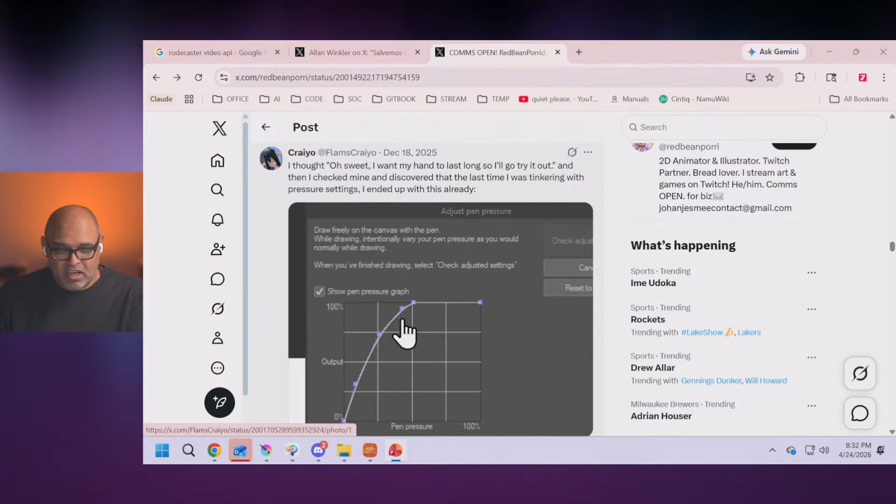And this person, I gotta tell you, well, I'll get to that later. Everyone, I see a lot of people changing the global pressure curve, and I think you should not do that.

Uh, wild curve. We can try it. We can try it.

Let's see, Lucky or Luca says: there are way too many variables to say this will work for everyone. True, that's totally accurate. I think better advice is to tell people to try different configurations if they're suffering from wrist or any arm-related pain.

It also depends on the specific pen. Let's suppose you have two pens, right? Let me pick up two pens here. You have to use a different pressure curve for each one. Actually, you don't - if the pens behave similarly, you don't need to do that so much.

But a Huion pen might behave very differently than a Wacom pen, right? And two Wacom pens might behave very differently. So it's per pen unit, not just per pen model - it's per pen unit, which is another fact lots of people do not realize.

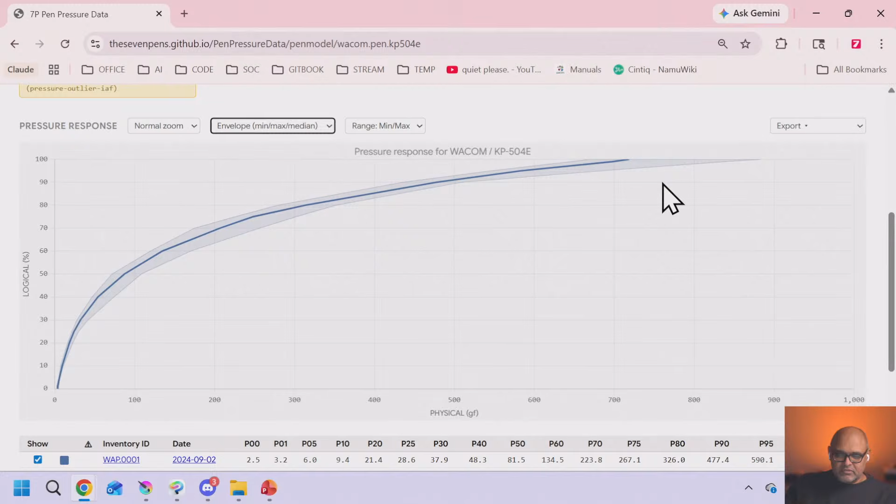Now I'm going to do one more thing. I think I'm going to take pen families and just group them all, and click them all. And I'm going to compare them, okay? Now watch this, I know it looks like a mess. Don't worry about it. Here's every pen I have. What do you notice?

It's kind of a pretty graph, right? The maximum pressure is all over the place. Let's go ahead and just take a look at the envelope. If you look at all the pens I have, some of them go all the way here, but they all go up sharply at the beginning.

What does that mean? What does it mean that they all go up at the beginning, pretty sharply? Some very sharp, like this blue line. I'm pretty sure, I can find that out, it's probably a CP913 or 23. Some don't go quite as sharp.

What does that mean? Well, the secret is understanding that the left column, or the y-axis, is the logical pressure, the percentage of pressure. So let's put it this way: I have the numbers here for these pens. Let's take the Wacom, it's called the KP Gen 2. That's the Pro Pen 2 family.

If I press, what does it take for me to get to 25% pressure, right? For the Pro Pen 2, I really have to press it with 25 gram force. That's 25 pinches of salt. Okay, now what about the... let's see, I would say it's decently sensitive.

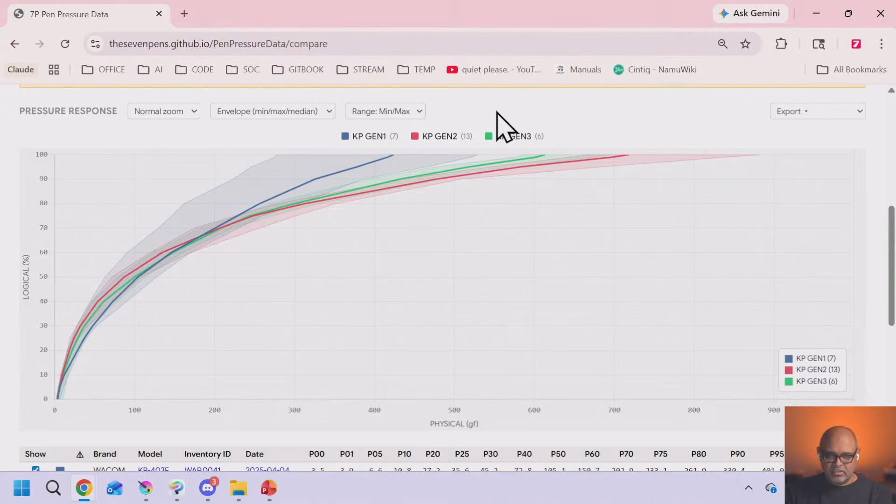Let's scroll in here and go to envelope and make sure... I don't know why, oh no, I looked at the wrong chart, I'm looking at flagged. Let's go to envelope and split them by family or by model.

I found them very, very similar actually. They're high, whereas the Pro Pen 2 ends up like 700 something. Their max pressure ends up at 400. That's why 400, 350 is kind of my threshold for good, because for like a decade these pens were considered the best in the market. So I think it's good to say 300, 400 is the bar for a good pressure range.

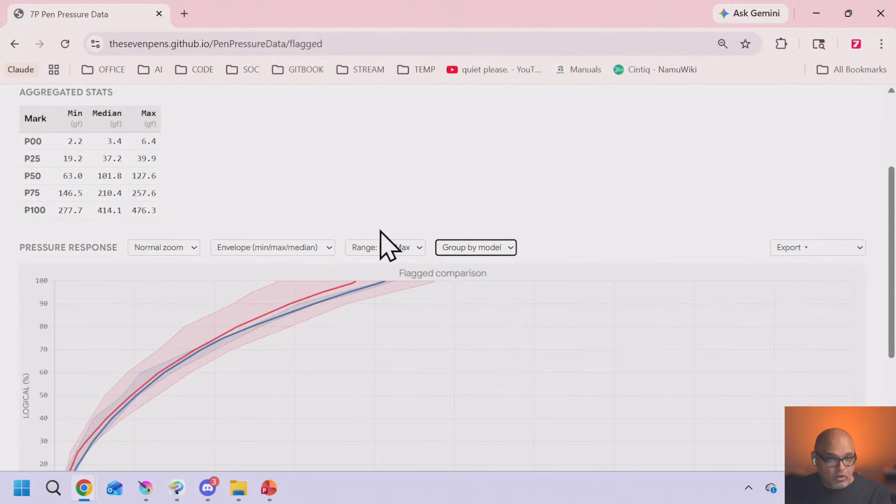Again, they're steep at the beginning. That means they're a little hypersensitive, hyperreactive at low pressure. Now what does all that mean? Well, we're going to show you that too, because we have tools to help you.

I think it's called Curve Explorer. Yeah, it's called Web Pressure Explorer. My fault. Okay, copy and let's paste it in.

So I'd like you to open this up. And you have to have a tablet, obviously. I'm going to move my keyboard to create some space. And it doesn't matter what pen you have, okay? I just want you to take your pen and draw, there's two canvases on the right. You can draw on either one, doesn't really matter.

Tablet plugged in. It's not reacting to it. Not reacting to it, why is that? Oh sure, let's try this. I didn't have the hub plugged in. No, looks like I had to plug it in directly. Not a problem. Sometimes USB hubs don't work the way I expect.

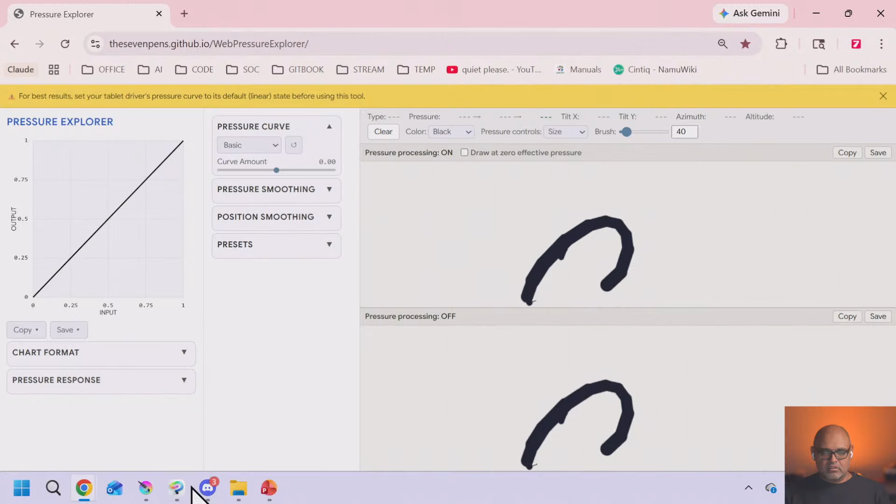There we go, and there we go, I'm drawing. Okay, and let me clear. Add Pro Pen 2? Happy to. Let's go back there, I'll have to restart that.

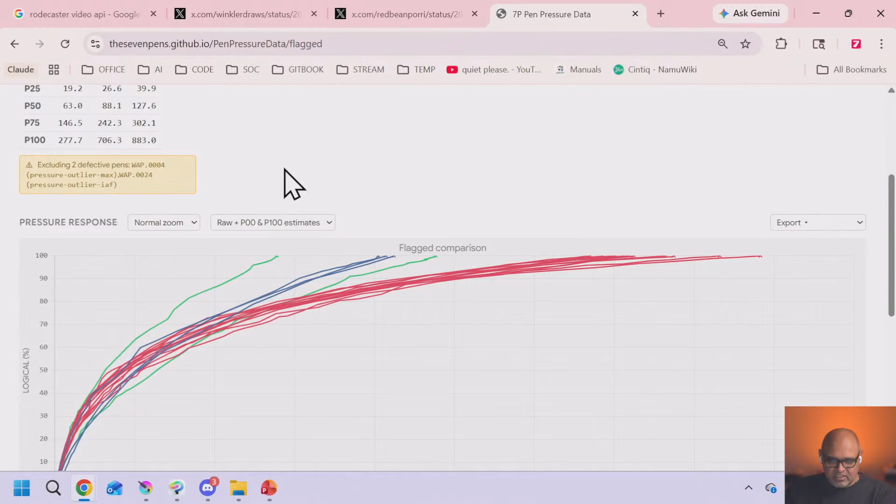Stream tools. What was it called again? Pressure... oh, it's data, pressure data. Yeah, okay, the flag, let's add another. You wanted Pro Pen 2? KP50... sometimes I can't even see them. KP504, okay, I have 9 of those and 13 measurement sessions. Let's go back to flag, take a look, divide by, make the envelope and group by family.

So you can see red is KP504, the Pro Pen 2, right? So it's a little more hypersensitive than the previous generation, and it has quite a bit higher, almost double the maximum pressure.

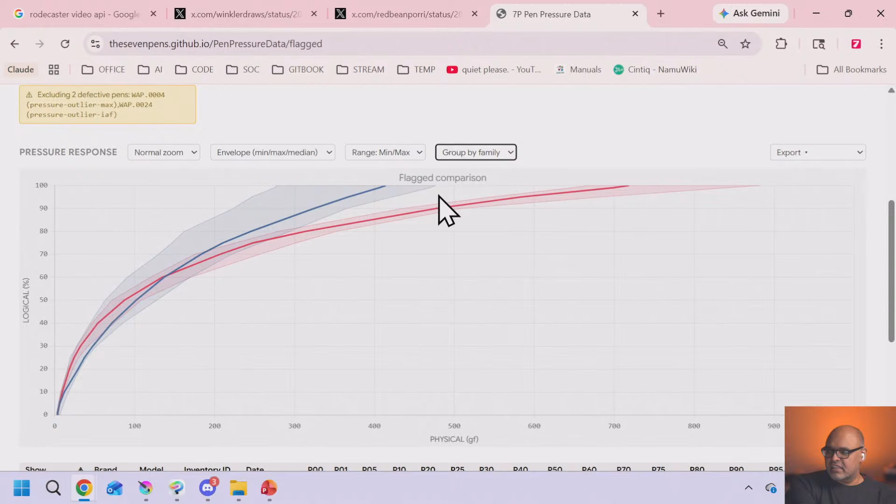Let's see, Aquareg says do the Samsung Ultra 22. I see, do all those Samsung Ultras and Samsung Galaxy Tab pens have the same pressure curve? We can take a look at that. I can't say about the pen that's in the phones, but I can tell you about the tablets. Good question, let's take a look.

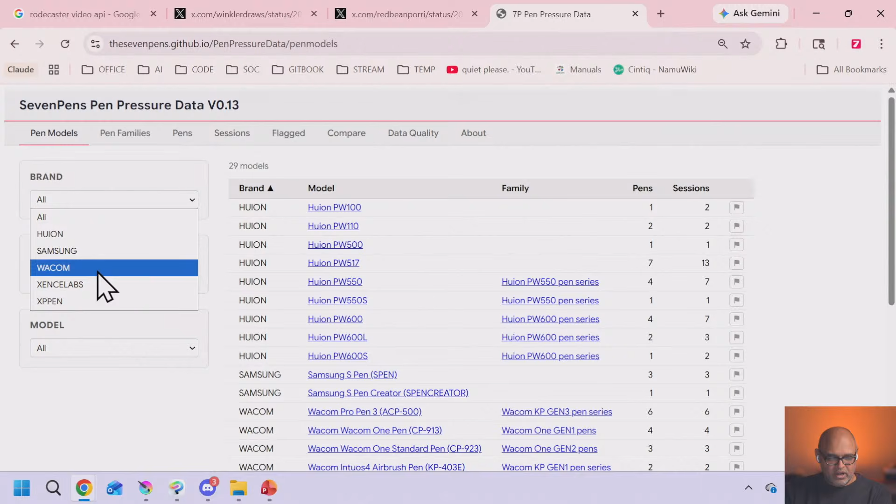Let's clear these flags and take a look at brand Samsung. And what do we got here? Yeah, I'm going to put these together. And let's just take a look at the flagged.

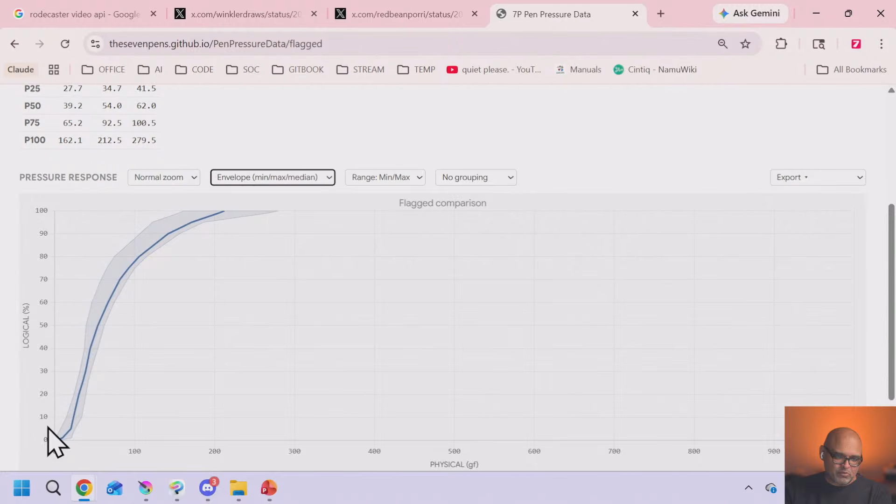By the way, there's some messed up stuff with the IAF, so don't pay too close attention to it. They have a high IAF, so basically these pens are... actually let me give you a little more information. They have a high IAF, so they kind of ignore the beginning part here, that's why it looks strange. I wasn't good at measuring at the time, I've gotten better but not perfect. They rise up very steeply.

And they end really quickly at 200. 200 is like, okay, it's like okay. And some are to the left. Remember, that line is the median, half of the pens are to the right, half the pens are to the left. So some are like 160 gram force maximum pressure. Not great. Why is it not great? Because when the maximum pressure is low, you will suddenly hit it. It's really hard to control pressure when the slightest touch will send you to 100%, okay? And there's nothing you can do to stop that. Pressure curves can't save you from that.

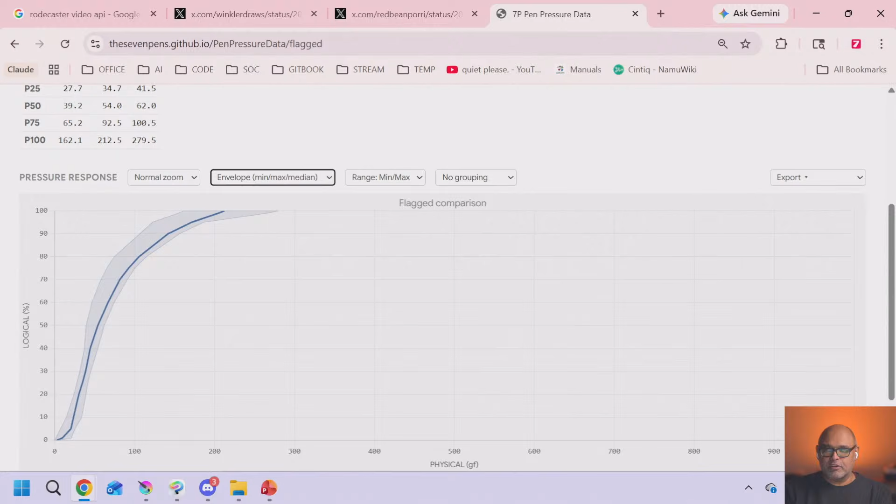Now I'll say one more thing to be completely honest. I also believe that the pens and even the drivers that talk to them are designed not to have low IAF.

They are those S Pens and Wacom CP913. They are designed not to have low IAF. They're engineered to not have it. Why would that be? Why would I make a claim that's that brash? Number one, remember I told you they use an older form of EMR? Well, so do some Huion pens, and those Huion pens have significantly lower IAF than these. So that tech isn't the reason, or at least you can't fully explain it that way. Number two, I think there's a business reason. I think they don't want those pens to have super low IAF because they want to sell you on professional tablets that have professional pens with really low IAF. Okay, that is my statement.

Okay, KP701 versus KP5. I love this. People are asking to look at data.

You know, this reminds me, I watch a YouTube channel. I forgot, the guy's name is Dan McClellan. He's a scholar. I'm not religious, by the way, I just want to make sure you understand this. But I'm really interested in the study of religion, and he's a scholar of the Bible, in a textual criticism sense. He's not religious on his channel about his beliefs, he just talks about how the texts originate and what we can interpret. He speaks Greek and ancient Hebrew, kind of an amazing guy. But his theme is a concept called data over dogma. What do you believe? What have you been told to believe versus what was written? How has the text literally evolved? Now, whether or not you're religious, I hope I didn't offend you, but I liked his approach of data over dogma. The drawing tablet world is filled with a lot of dogma about how these pens behave and what pressure curves do. I'm trying to give you the data so you can make your own decisions. And that's why I have maybe peculiar views.

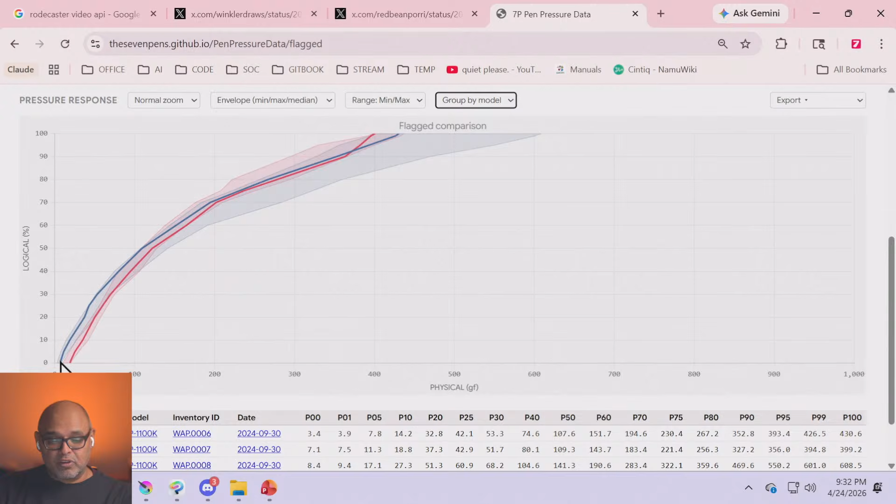Let's go to envelope, I should make envelope the default. Did I not add the second one? Let me group by model. So, very similar. Now there's something weird that happened with the IAF, I may have messed that up. So don't pay attention to where they begin, just pay attention to the overall curve. I think, can you see? You can't see it, my mistake. Okay, sorry, here we go. Don't pay attention to this part, I believe they're closer than this implies, I had made a mistake, and so I need to remeasure these pens. But just assume that they both are really low, like both are where the blue begins, okay? But just pay attention to the general shape. I think they are basically very similar, right? That's what my data says. I see some variation, but again, I measured these pens when I was a young tablet researcher, okay?

Plastic nib on the S10 feels so good and glossy, not on matte. Yeah, that's what I thought. I know on paper the S Pen is supposed to be a really crap pen, not supposed to be great. However, I actually really like drawing with the S Pen on a Samsung S tablet. I don't know why, but I like it. It feels good to me, even though I'm used to the Pro Pen 2.

Okay, so now you understand what pressure response is and the behavior - this is what the pen actually does. Now let's try to understand what the pressure curve does. For that, I gave you the other tool, wherever the heck it is.

Let me find it again. Clean up. Tools. Okay, let me paste the link. It's called the Web Pressure Explorer. I have a local version of this on Windows, but this is good enough.

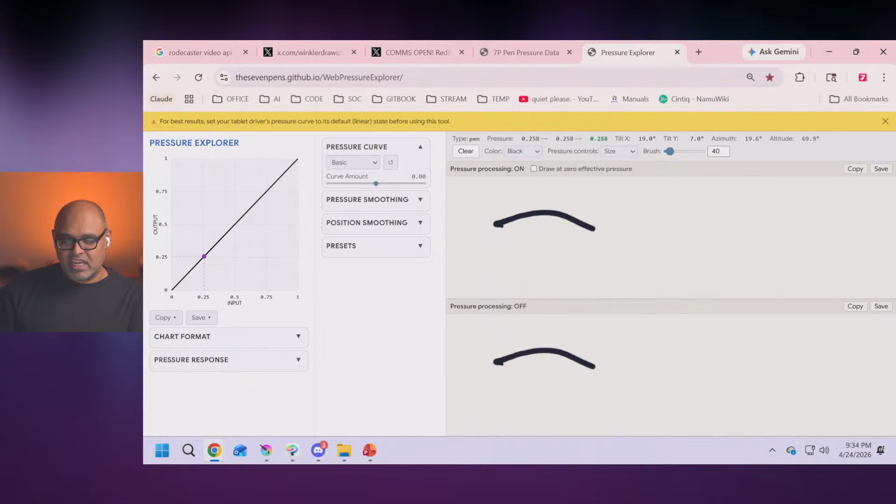So let's pretend we're looking at the driver for a second. Actually, I'll switch it like this. Okay, so here's the curve. Now open up the app, and on your tablet - doesn't matter top or bottom - just draw. The same stroke will be drawn. Just sketch, doesn't matter. Try to draw light, try to draw heavy, and you can hit delete or backspace to erase.

Now, first of all, the curve is here - what does the curve mean? It's straight from the bottom left to top right. This curve means do nothing, it is not doing anything. I'll prove that, but first let's see a little bit of what happens.

Let's try drawing real light near the low end. What do you notice? There's a little dot here when I'm drawing - that's the actual pressure, a purple dot. Note, I'm trying to keep it steady, but it's hard - I have to really work with my hand, trying to keep it between certain levels, and it's bouncing up too much. Now, because this is a web app, you have to keep the pen moving - don't keep it still, the web apps don't read the pressure correctly if you're not moving. It is hard to keep it still at low pressure, it's very normal.

Now, what about at high pressure? I'm going to go really high - I can keep it pretty still. Why is that? It's really easy to press down consistently high, right?

Here's an analogy I would use. Have you ever seen someone balance something in their hand? Let me just show you this. I have this - what do you call it, a level? I'm going to try to balance it in my hand. I will really try this. I can kind of do it, actually.

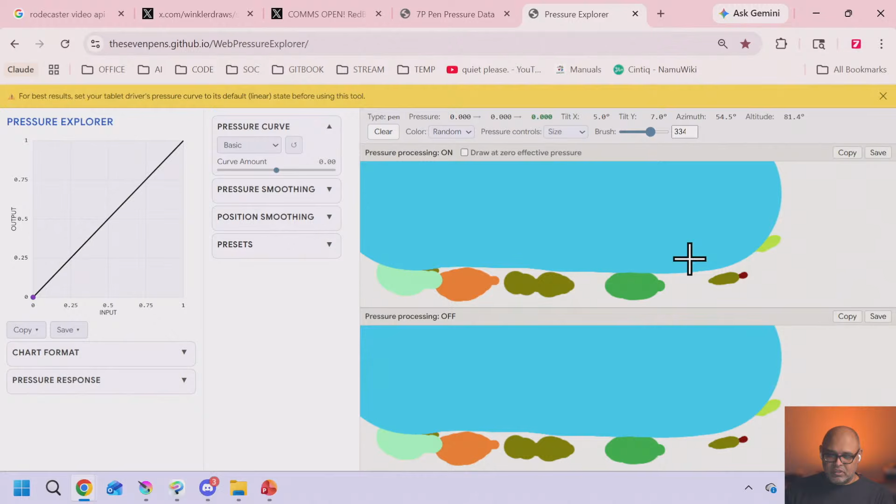It's such a big pen. Let me change the brush size. It's pretty consistent, it's not jumping all around the place, is it? It's smoother because it's easier for me to deal with the mass of the system. So pens at low pressure are hard to control.

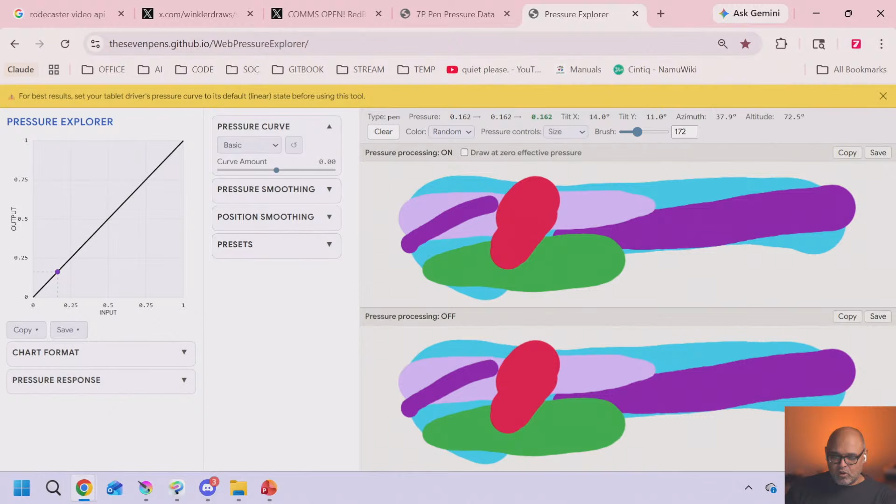So if you're drawing at low pressure, look at this. Let me erase this. This is a 172 pixel brush, but it's hard for me to get to like 1 pixel, 2 pixel, because it's hard to get to those small values. It's overreactive, it's hyperreactive.

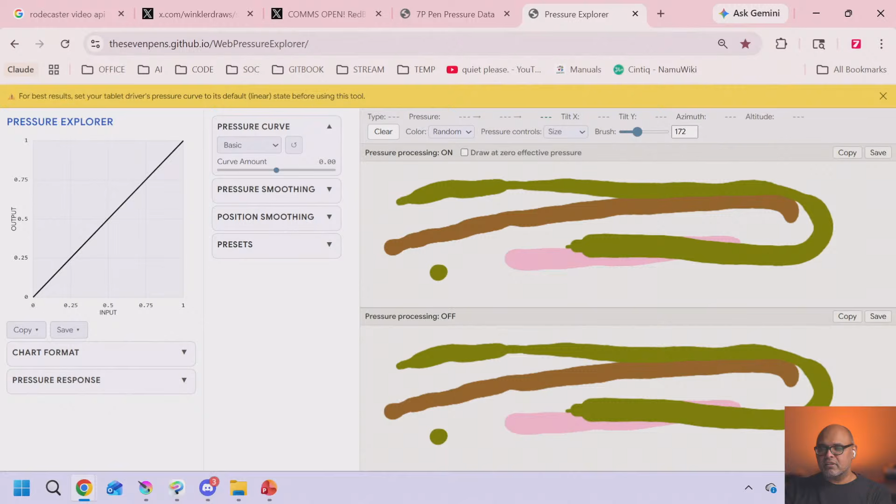Here's what you can do. Now the top is the process pressure, the bottom is the raw pressure, with no pressure processing. Oops, my music is off, let's bring it back on. Okay, let me get some water.

Okay, here we go. We're going to take a look at the pressure curve. Now the different pressure curves—this is called a basic pressure curve, and the basic pressure curve is just a curve amount. I'm going to make it like this. Okay, what does that mean?

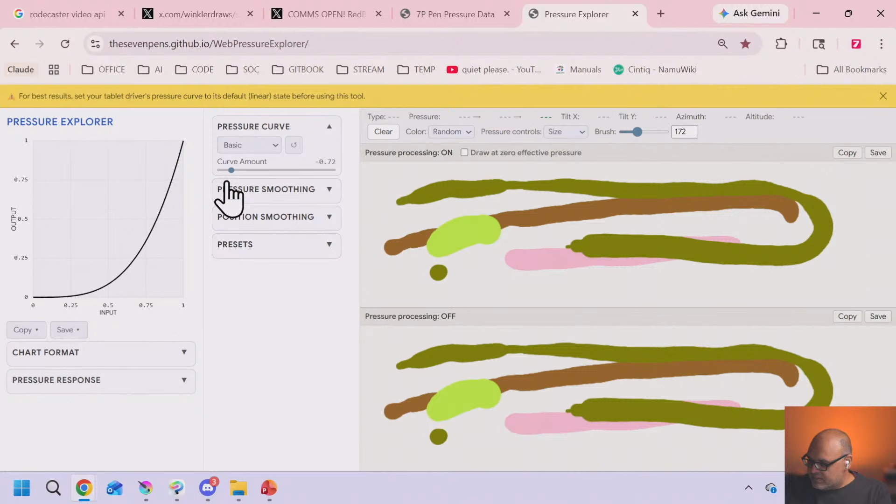Let me delete this picture, sorry. Oh, I have a button for it, okay. Now I'm going to draw super light pressure. Whoa—the top is the process pressure, the bottom is the raw pressure. Look at this, suddenly I'm able to draw really light strokes, produce really light things.

And look at the dot—it's bouncing left to right, but it's not bouncing up and down, because of the curve. That's what curves like this do for you: in some sense, they keep the logical pressure kind of controlled. There's other ways of controlling it, but you see the difference?

So if you're doing some calligraphy, for example, and you wanted to go between thick and thin, you should make a pressure curve like this, right? And it might surprise you how much you have to make this curve bend over like this and go over to the side and up.

You can see this brush is 172 big. With the normal, without this curve, I'm just making big strokes all the time—I can't, they're just all big. Okay, but with the pressure curve, let me clear it again. Look how blobby they are without it. But with the pressure curve, wow, I'm actually able to control it.

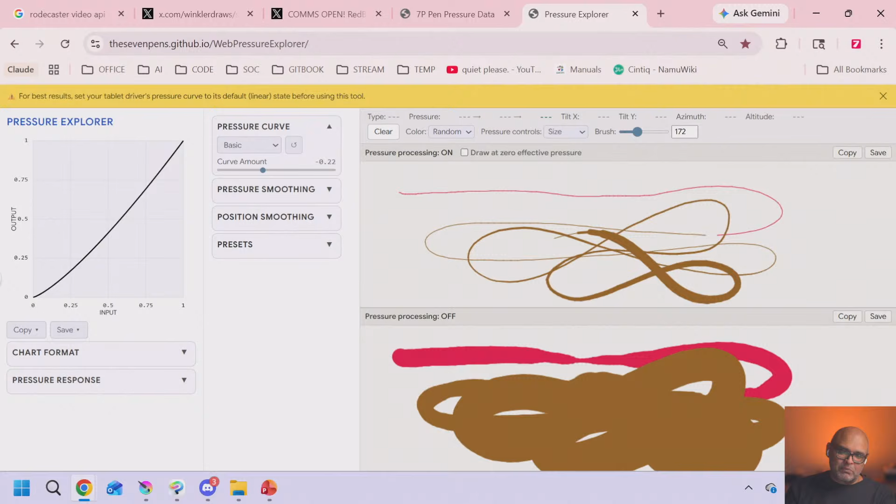Does everyone get that? Okay, let me take a look. Now you can curve it here—I think that's a little extreme, to be honest. But if you just do this, you're not getting much effect. Trust me, I'll show it to you. Light curves produce an effect, but it may not be what you want.

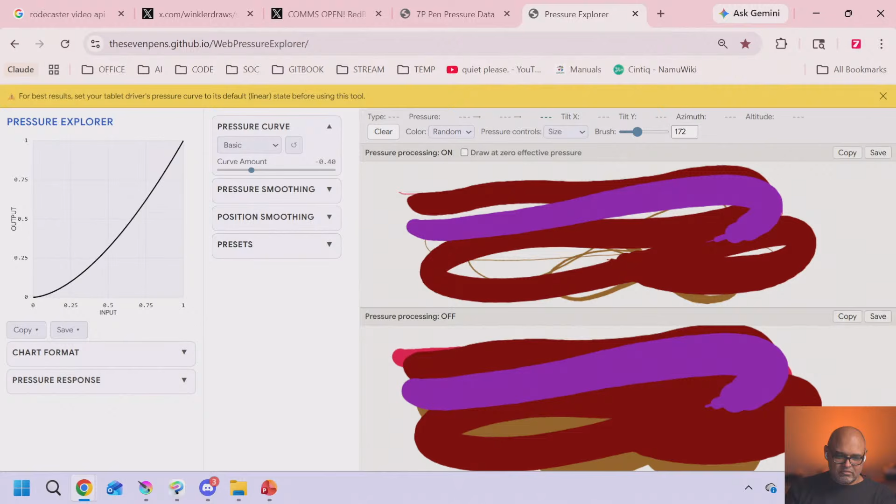I really think you should try something like this if you want this kind of stroke. Now, not everyone wants this kind of stroke. So before I continue, I'm going to ask the chat: does everyone understand what is happening with the pressure now?

I'm taking the inputs on the bottom, the outputs on the side. It's saying, in this part, as a person's pressing, don't change the logical pressure much—map it to a smaller region. And then, it's going back up here.

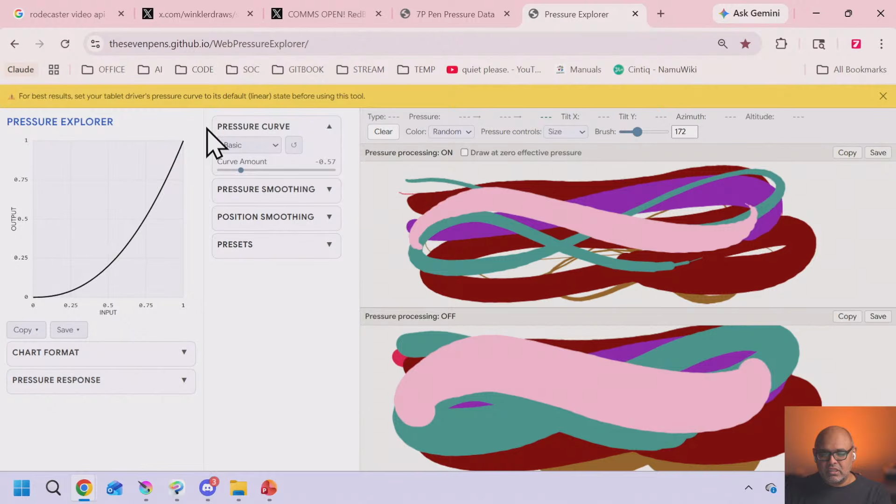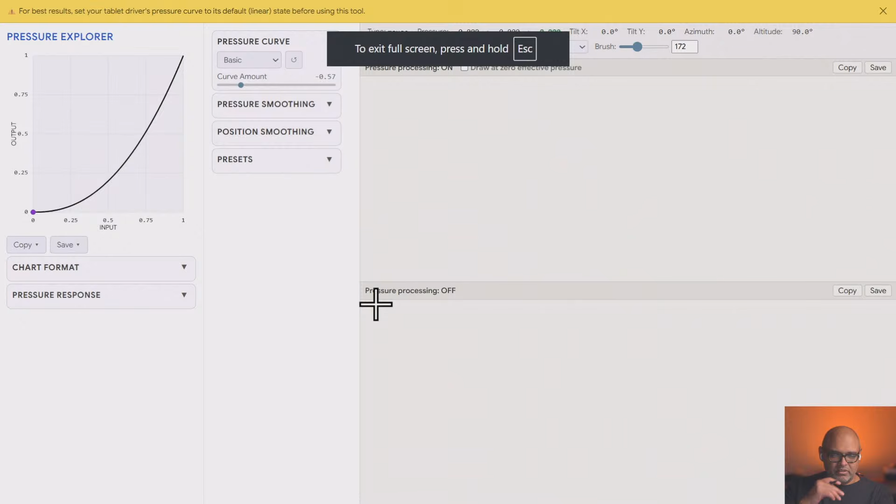It's becoming more sensitive. Now you're probably thinking, oh, the pen is hypersensitive now at the top—that's probably an instinct you're having. How can this work nicely? Because it's way too sensitive at the top. And that's a logical conclusion. Well, we can show you what's actually happening, because I've measured the pen.

So let's load one of my pens. Okay, let me clear this curve amount here. This is a Wacom Pro Pen 2 on the bottom left—that's the actual data. Notice it's hyperreactive near the edge.

It's overreactive. What happens when I change the curve amount? Watch this—uh-oh, I made it linear, that's why it shows like this. Does everyone get it? That's why I tell you the pressure curve is not the behavior of the pen, it's modifying the behavior. This curve makes this behavior linear. That's why the pressure curve is dependent on the specific pen.

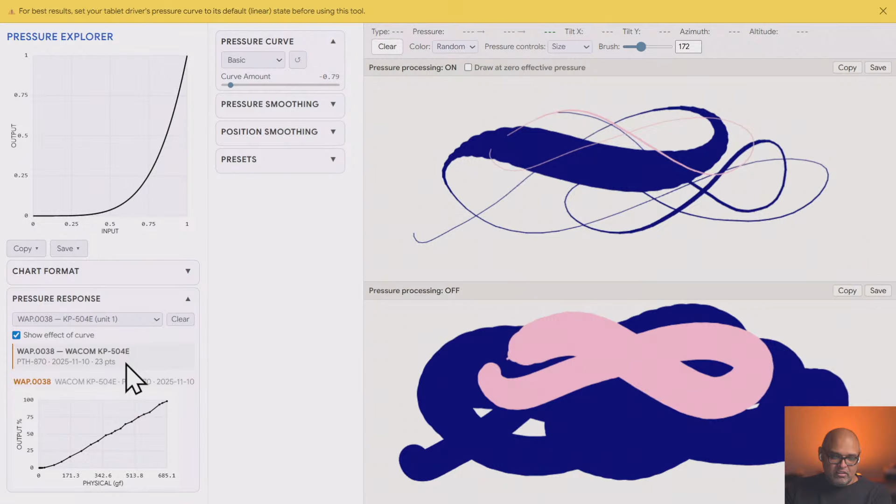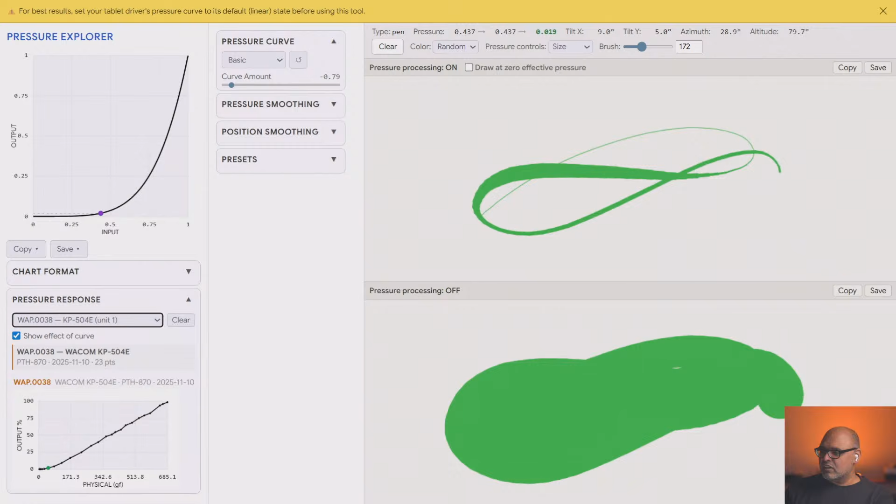A different pen will have a slightly different curve—you can see that here, right? These pens are very similar, so there's not much difference. But you get the idea? Okay, I'm waiting for the chat. I want to make sure people are on the same page with me—can you see what the pressure curve is really doing?

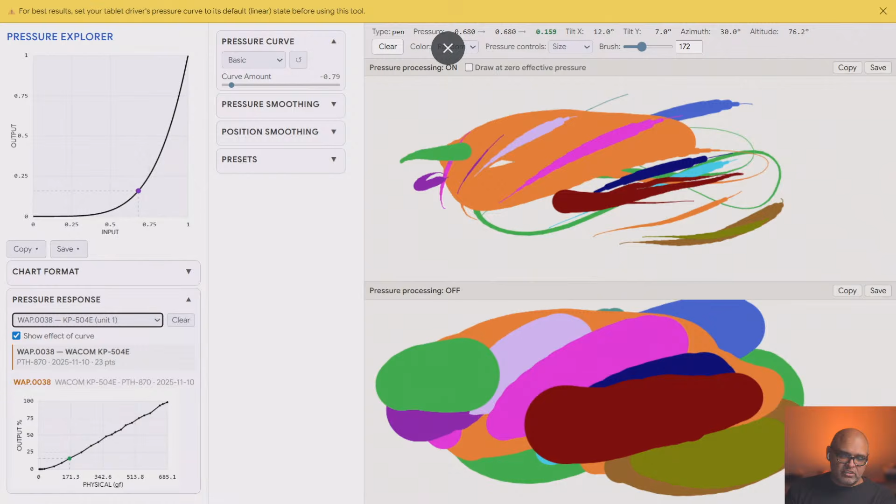Right? So when you think of the ball, think about how much it's rising. I can control its vertical distance very easily at all levels. Even though it's moving horizontally a lot, I've got it in control because it's the vertical that matters. It's logical output, okay? Does that make sense?

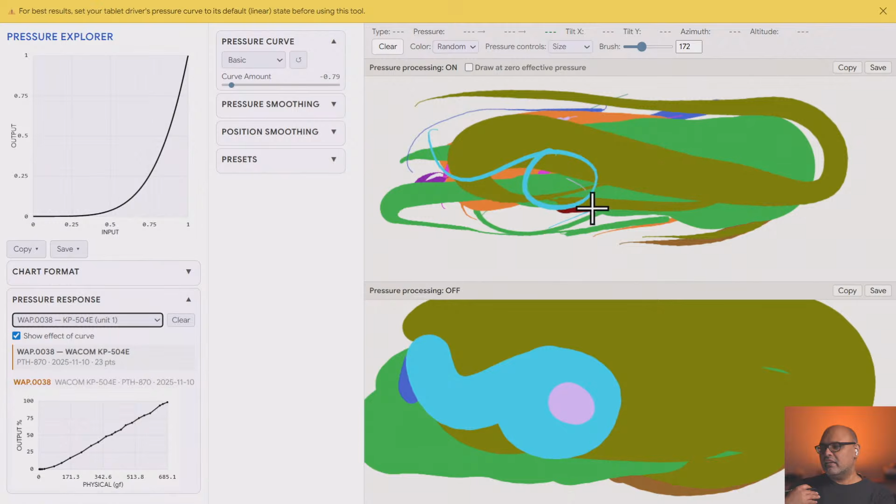Okay, I'm gonna keep on looking, keep on asking because it's so important. Now when someone does this kind of curve, they come up with a complaint. You know what the complaint is? They say, and this complaint can happen in other ways.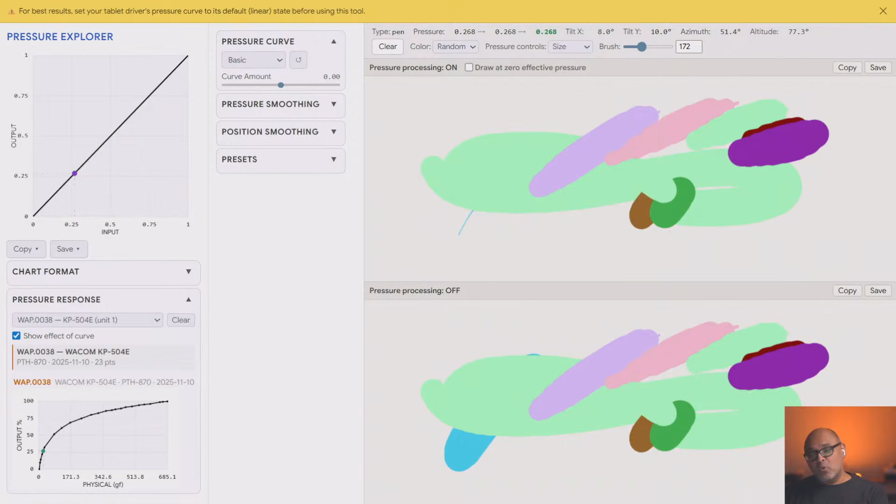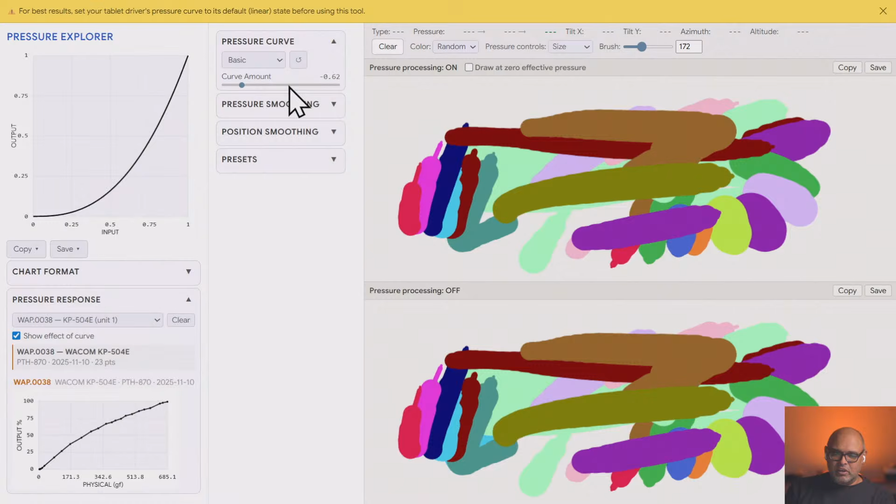So some people are drawing, and I always tell people, make your curves like this. They do it, and then they're like, well, but when I draw, my strokes are too small. I get it, you want thicker lines. How can you make thicker lines? You can make your brush big, but even if you make your brush big, look, I made my brush almost 200. Still, at low pressure, my lines are super thin.

So when you have a curve, it really affects the brush. So let's put the brush back to a normal size, like I don't know, 60, and reset the curve.

So what they will do, because they're like, I like the idea of the pressure curve making things more controlled, but the 7 pens guy, when I follow his advice to make it like this, it's messing up my thickness. What they do is they do this. Now I want you to take a look at the bottom. Look at the bottom's over on the other side of me. Okay, yeah, this side, that's the actual behavior of the pen.

What happens when I change the curve like this? That thing is crazy, it's jumping up almost immediately to the maximum pressure. And they're interpreting this as, oh, I get thicker lines, I have more control. Actually, this can work, and the reason it works is because you're just slamming your pen down there and you're not working at super low pressure.

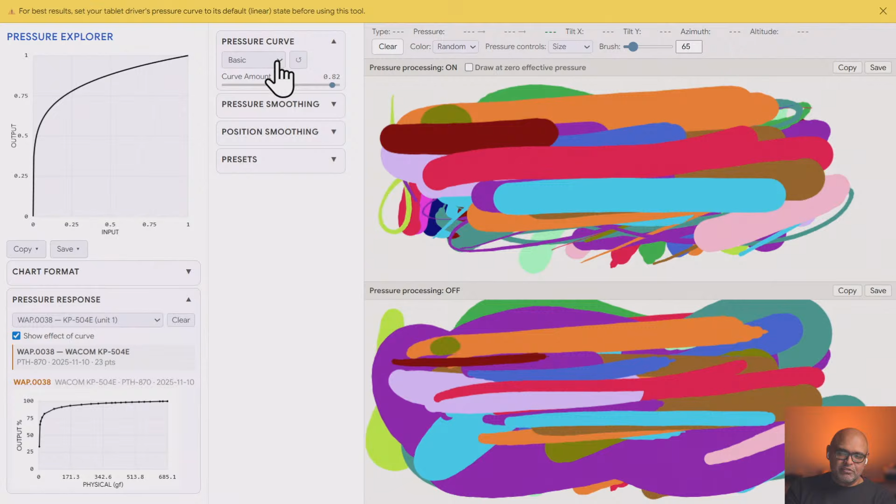I think there's a better way of doing this. Well, we have sigmoid, we can take a look at sigmoid. Instead of this, I'm going to change my curve type to extended for a second and reset. Instead of that, you raise the output floor like this. By the way, this same thing happens in Photoshop curves, right?

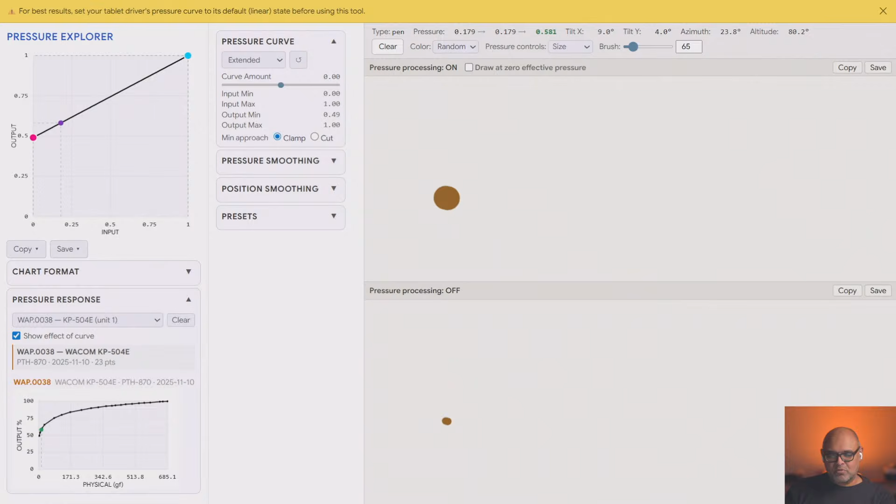Now this says the very lightest pressure produces an output of 50%. So guess what? Now my curves look thicker on average, right?

So again, pressure curves change the behavior of the pen, they are not the behavior of the pen. You don't know what the behavior of the pen is unless you measure the pen like I have measured them. You can make some guesses about what's happening. Okay, next thing.

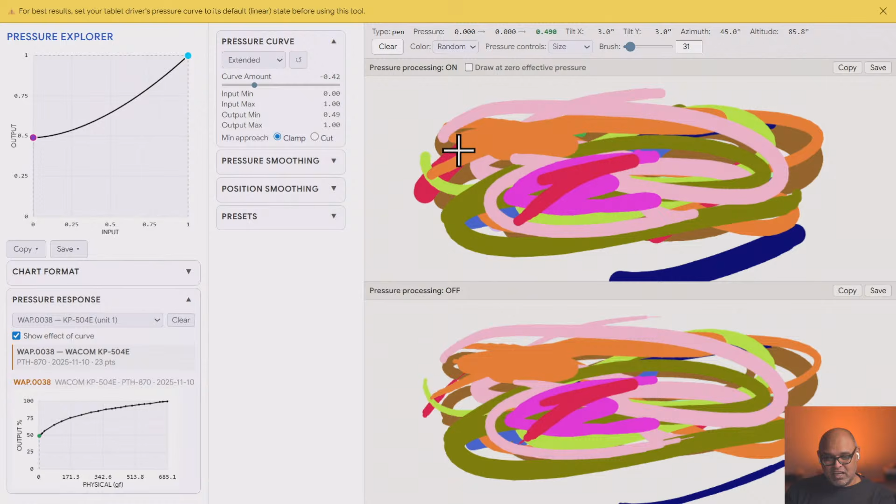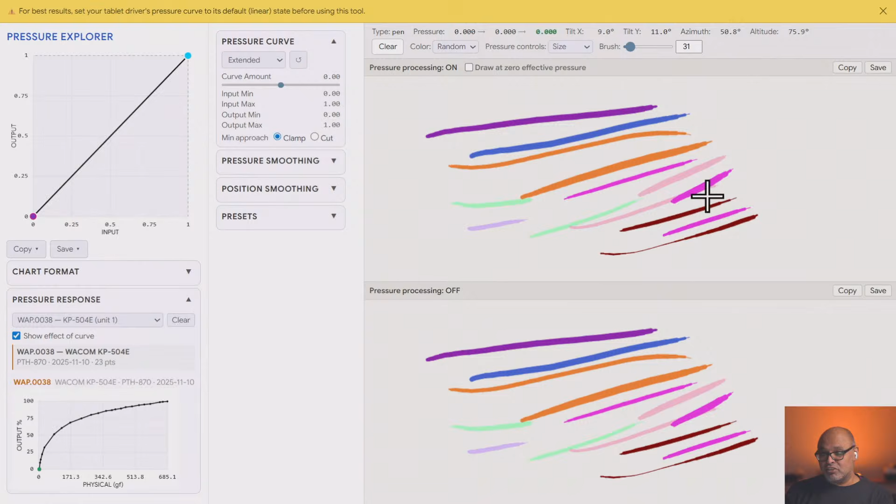Let's go reset this curve. Some people notice that they touch the pen to the surface and they don't want to draw, they want to press harder. They want to increase the IAF. Can you increase the IAF of a pen? You can, you can't just decrease it, but you can increase it with a pressure curve.

Watch this. I'm gonna do it quite a bit because you have to see it. You look at the bottom curve as well, you see what's happening there?

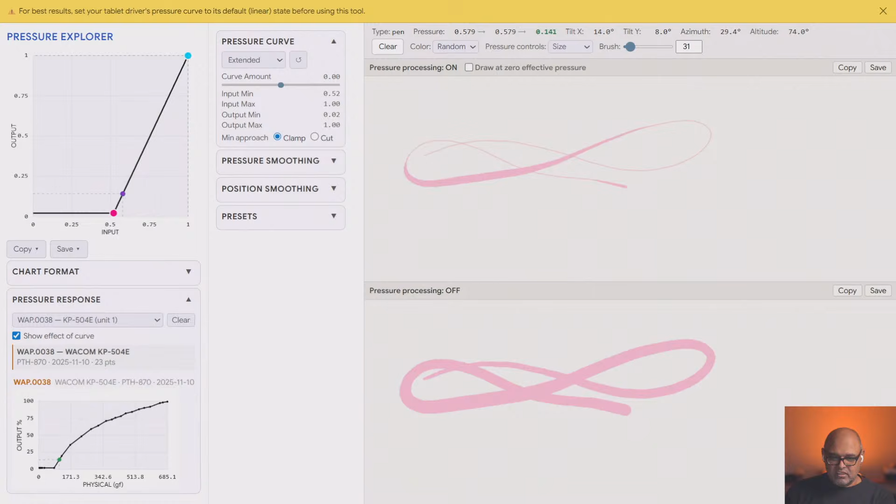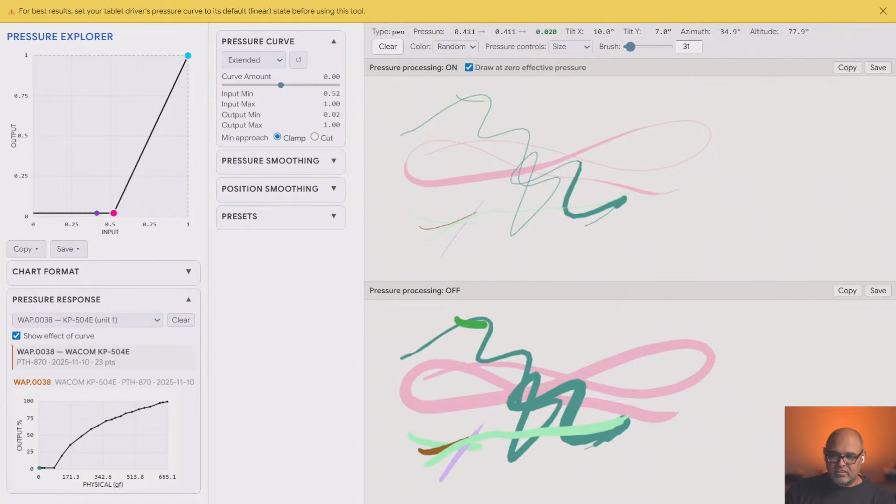Does everyone see? I'm increasing the IAF, let's prove it. In this code, I have it drawing when there's any physical pressure, zero IAF. But let me see if I can change that. It shouldn't be drawing anything, but you get the idea, right? Let me try it this way.

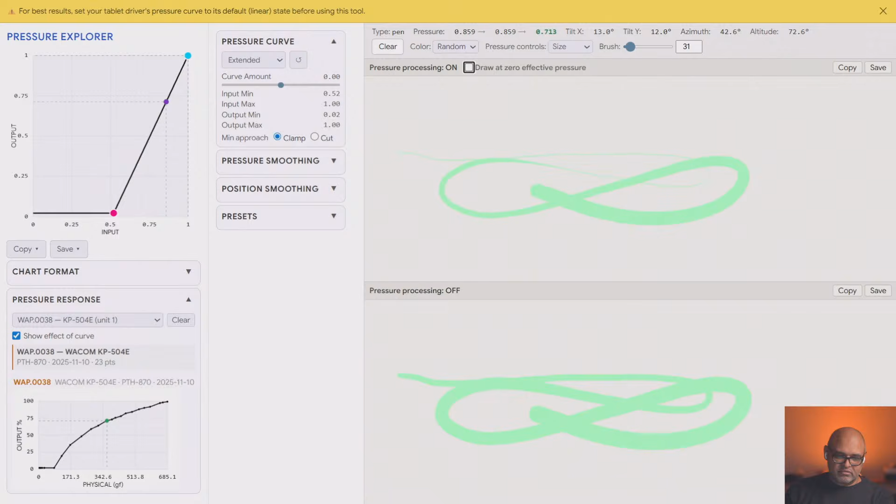And then suddenly it starts drawing here, right? That's an increase in IAF. So there's a slight bug in my UI here. But you can increase the IAF that way.

A lot of people, oh I see what happened. I actually increased the size of this. I lifted this up a little bit. I meant to put it all the way down. Let me do it this way. Now it should work.

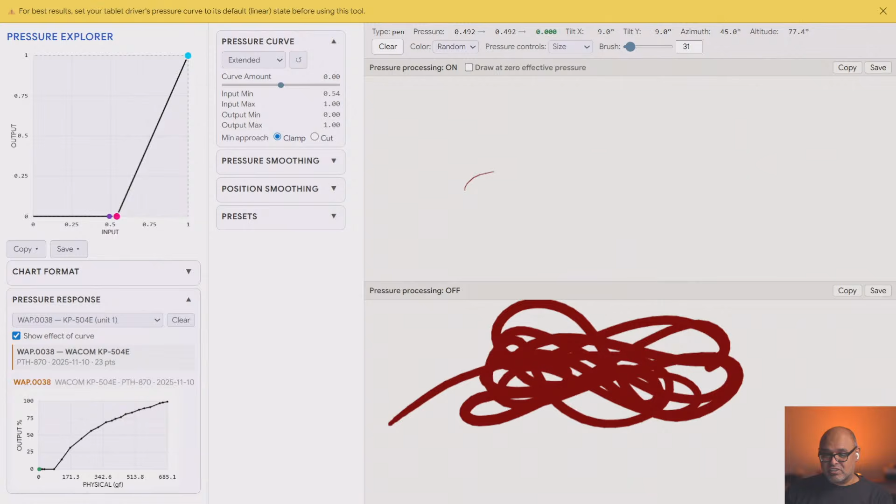I'm drawing at the bottom, but because I've increased the IAF on the process part on top, nothing's getting drawn. But once I hit that threshold, it starts getting drawn. So that increases IAF. Whenever you see that, it increases IAF.

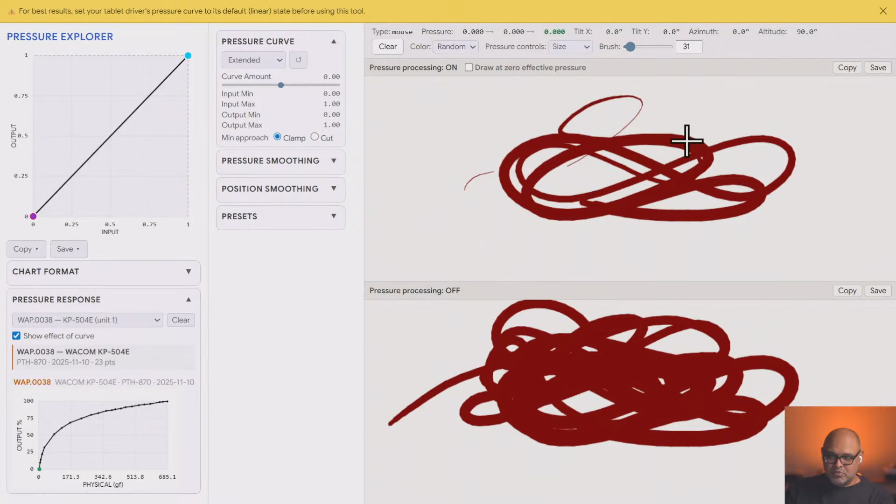Can you decrease maximum pressure? Sure, you can. Let me show it this way. Obviously you don't know how hard I'm pressing, but I'll have to just tell you. I'm pressing down pretty hard for this pen. And that's how I get the maximum pressure.

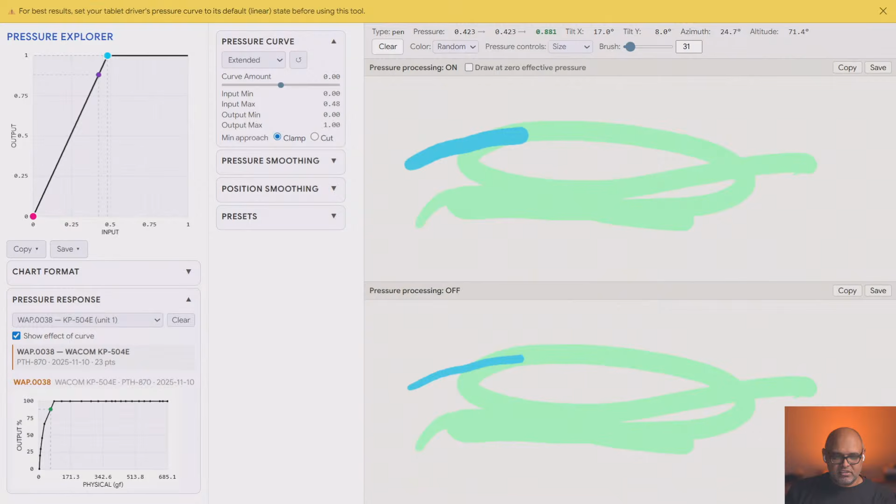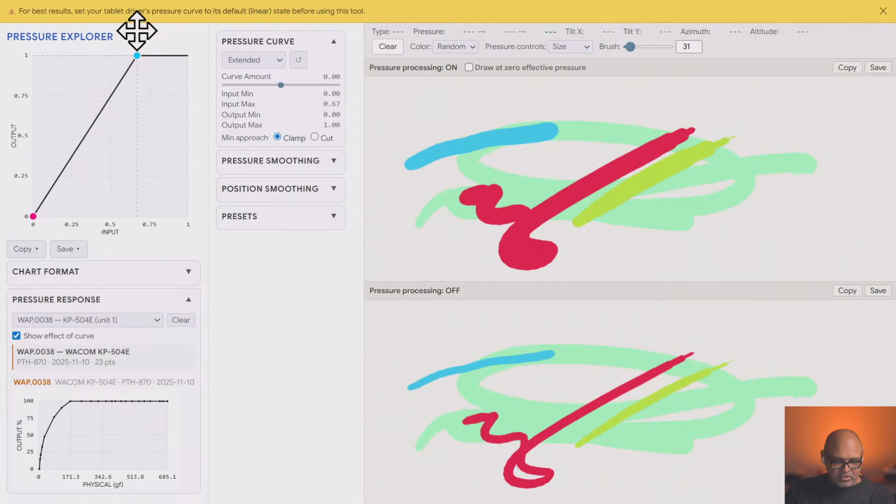But let's just say I don't want to press down that hard. You move this over here. Oops, not down, just to the left. Now I have to press, you see the effect on the actual pen, right? Since I measured this pen, the maximum pressure went from 685 gram force to, looks like about 170 gram force, right?

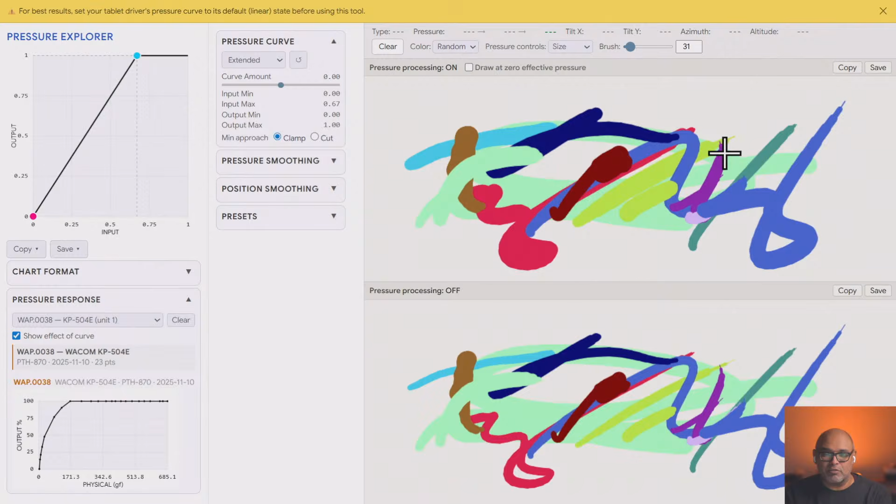So now I can get to 100% really easily, maybe too easily, honestly. This is useful because there's a couple of uses for this. Number one, again, some people don't want to press down that hard. Sometimes the pens are defective, they require too much maximum pressure, so that fixes that.

Typically, I think, if I go reset this, a curve like this, you start off with. If you want to make your lines a bit thicker, you can increase it like this. This is what I think most people should do. And if you need to decrease maximum pressure, you do this. This is, I think, a curve that a lot of people can work with. We actually saw some examples similar to this.

Now we can try sigmoid. Honestly, when I try sigmoid, I don't really get much effect with it myself. It doesn't do much for me, in my opinion. But I think for some people they like how it feels. To me, I still think it doesn't help me as much. But some people like it. I have tried it, but I've never found it made a big difference for me.

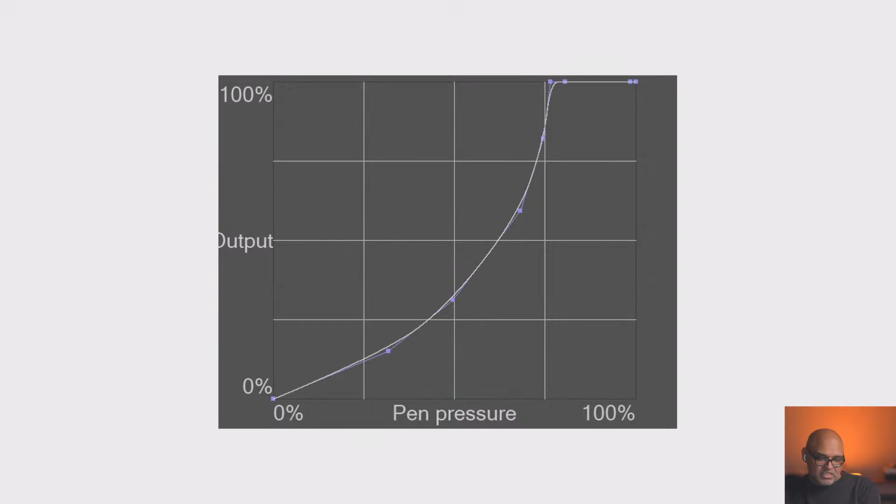This one's very similar, just didn't change the IAF. This one's actually very similar too, but again, by curving it up, they made the pens overreactive.

Okay, so now you know about pressure curves and what's going on there. I will try to do a video explaining this, but it takes a lot of setup for this.

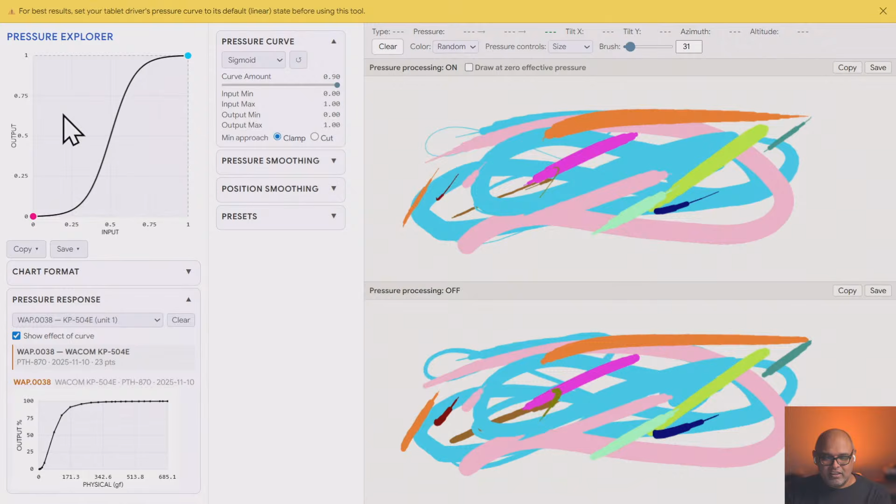Okay, now let's talk about... hang on, let's get this moved out here. Was that good?